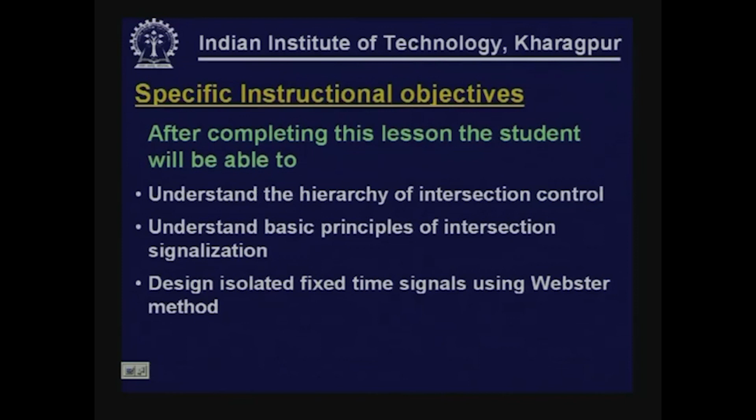First, what is an intersection? In a given road network, you have mid-block sections and intersection blocks. An intersection is simply where two or more roads meet at a point or an area, where two or more highways join and cross.

There are two basic types of intersection normally used. One is the at-grade intersection, where all roads meet at the same level, so all movements use some common area of the intersection. In a grade separated intersection, crossing maneuvers are permitted at different levels.

Grade separated intersections are obviously better, but most intersections found are at-grade, because grade separated intersections are capital intensive projects. Unless traffic delay or chaos at the intersection reaches a certain level, we normally do not go for grade separated intersections. So mostly the intersections we find are at-grade, where all roads join or cross at the same level. Our focus and discussion today is basically related to at-grade intersections.

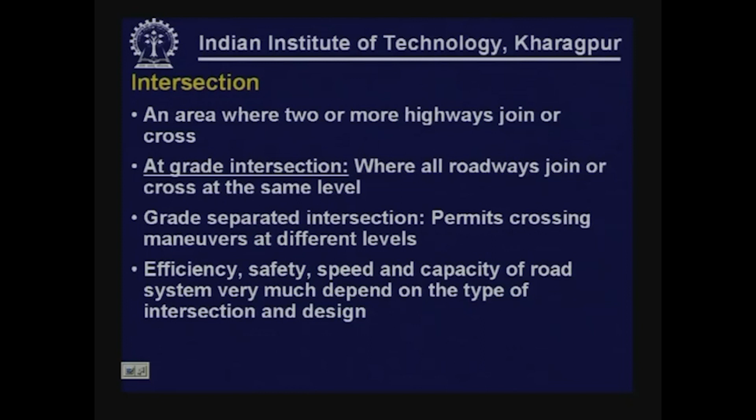Efficiency, safety, speed and capacity of the road system vary a lot depending on the type of intersection and design. There are different types of at-grade intersections, and also grade separated intersections, and what level of efficiency, safety, speed and capacity the road system achieves depends on the type of intersection and the design adopted.

An important concept related to intersection operation is the concept of conflict. Traffic movements at an intersection involve a number of conflict points. These conflict points are normally classified as major conflicts and minor conflicts. Crossing conflicts are normally considered major conflicts, while merging and diverging conflicts are also possible, and these are normally called minor conflicts.

Suppose a vehicle is going one way and another is coming another way crossing it - this is a crossing conflict, considered a major conflict. Similarly, if two vehicles are coming and using the same road, that conflict is a merging conflict. And if, from a road, some traffic takes left and some takes right, that conflict is a diverging conflict. Merging and diverging conflicts are considered minor conflicts because they are relatively less critical, while crossing conflicts are most severe, so we call crossing conflicts major conflicts.

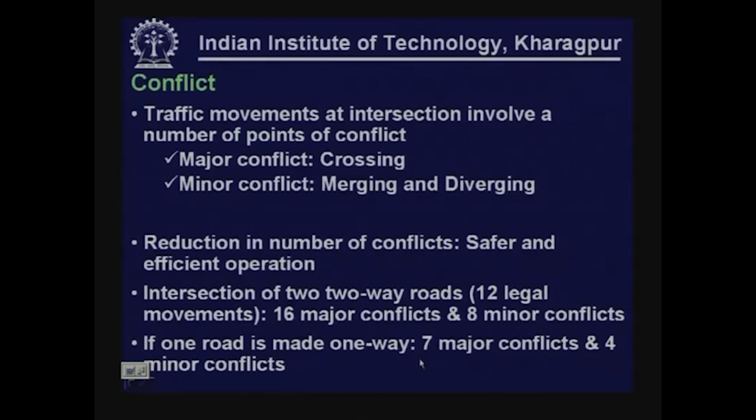Continuing this example, if we make both roads one-way, there will be further reductions in the number of conflicts, with only 6 conflicts, out of which 4 will be major and 2 will be minor. This is a typical example of a 4-approach intersection with two-way traffic on both roads, one-way traffic on one road, and one-way traffic on both roads, showing how conflict points are reduced.

If there are pedestrian movements, pedestrians trying to cross while vehicles are coming, this generates additional potential conflicts. So the critical task of a traffic engineer is basically to control and manage these conflicts in a manner that ensures safety - that is the most important keyword - and provides efficient movement through the intersection for both motorists and pedestrians. So traffic engineers focus not only on motorized vehicles like cars or buses, but also on pedestrians as essential elements in overall traffic engineering concepts. The task is to manage these conflicts to ensure efficient and safe operations for traffic as well as pedestrians.

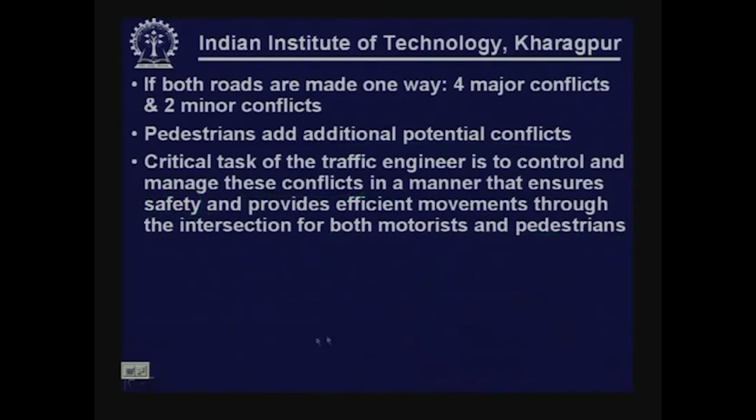With this background, you know that an intersection area is basically a very complex situation where you have different types of vehicle movements and different legalized movements creating conflicts. Also, once pedestrian movements are taking place, they add to the number of conflicts. So it is altogether a complex task, but the complexity varies from one situation to another. From your experience, you'll find that not all intersections are equally critical - some may appear fine, while others may seem chaotic and unsafe for both pedestrians and vehicular traffic.

So we need to understand the hierarchy of intersection control as a concept. There are three basic levels of control that may be implemented at an intersection: level 1, level 2, and level 3. This goes in order - in the most simple form, level 1 may be okay. As the situation becomes more complex, you go for level 2, and for further complex operations, level 3. Even if that does not bring down the chaos to the desired level, you may have to think of a grade-separated intersection.

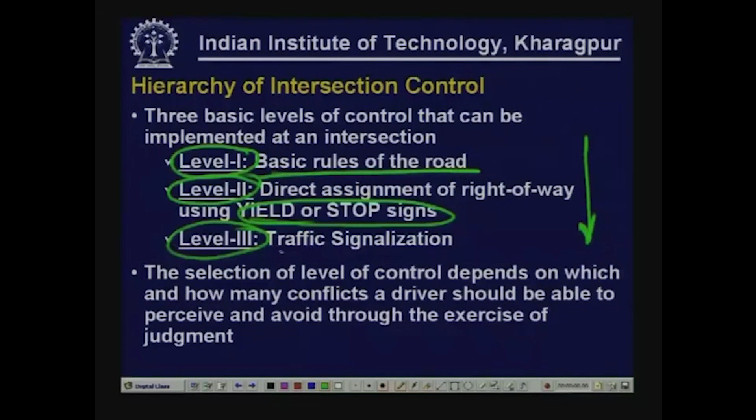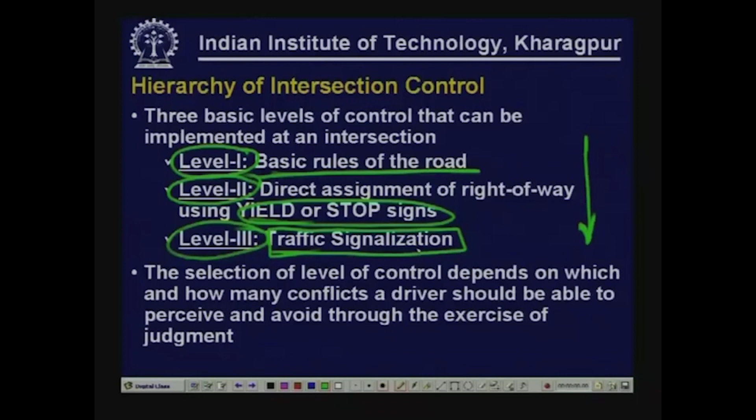That means you install a traffic signal and share the time for certain movements. Maybe while major road movement takes place, you stop minor road traffic, or both roads may be of equal priority, so you stop one and allow the other, then stop that one and allow the first. So with traffic signalization, essentially the same intersection area can be used for certain types of movements at certain times.

Certain types of movements happen at certain times, not all movements at the same time. Some movements take place at one time, others at another time - that is signalization. First, in simple form, we try level 1; if it's not adequate, we go for level 2; if still not adequate, we go for level 3.

Further, even within signals, there are many procedures - isolated signal design, individual signals, and it's also possible to coordinate signals. It's a vast topic area with many procedures to understand. If even with signals you're still not able to manage traffic or ensure adequate safety and efficiency, then one has to think of a grade separated intersection. But our main focus today is at-grade intersections, and further we will go into traffic signalization.

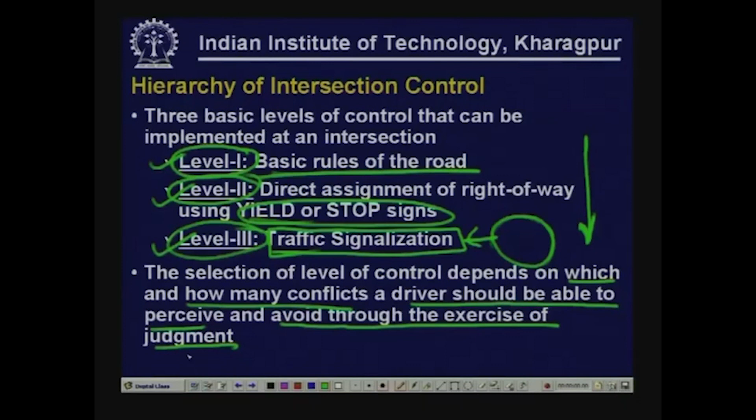Now you have level 1, level 2, level 3. The selection of level of control depends on which and how many conflicts a driver should be able to perceive and avoid through the exercise of judgment. So carefully observe this part - what type of conflicts, and how many conflicts?

Both are important - there are major conflicts and minor conflicts. So what are the types of conflicts and how many conflicts do you expect the driver to perceive and avoid, without making a crash or an accident? The driver should be able to avoid through the exercise of judgment.

If you find both the type and number of conflicts are good enough - much lower - and they don't impose a level of safety problem, then you may be happy with level 1, otherwise go for level 2. If you're still not happy and the situation is not under control, go for level 3.

Where it is not reasonable, due to the complexity of the situation and operation, to expect a driver to perceive and avoid a potential conflict, traffic control must be imposed - control by putting a stop sign, yield sign, or traffic signals.

There are two factors which primarily affect a driver's ability to avoid conflicts. One, the driver must be able to see a potentially conflicting object to implement an avoidance maneuver. This essentially means the geometric design of the intersection - a driver approaching from one approach should first be able to see a vehicle coming from the other approach.

First of all, the driver must be able to see a potentially conflicting vehicle. If he cannot see, because there are tall buildings or high-rise structures just near the intersection, then unless you reach the middle of the intersection, you cannot see a vehicle coming from other approaches.

Second, you may be able to see, but the volume levels that exist must present reasonable opportunities for a safe maneuver. This is another aspect we are trying to point out. What does it mean? It means maybe you are able to see.

So you have adequate sight distance, say a vehicle is coming from the minor road. The driver is able to see, but he has to get an opportunity to really cross or merge into the main traffic stream. He waits, but does not find any gap because the volume is so heavy, he keeps waiting for a much longer time. Then again he is not able to perform the maneuver he intends to do.

So in that case the volume level is critical. If your volume level is beyond a certain value, considering all the approach volumes for different roads, then the driver may not get reasonable opportunities for a safe maneuver.

So looking at the sight distance and the overall traffic volume at the intersection, both these factors affect the driver's ability to avoid conflict. If there is a reasonable gap and traffic volume is not heavy, the driver may keep patience to wait for a suitable opportunity. Otherwise, he may take risk and try to merge with the traffic stream even with a limited opportunity, which may cause a potential safety problem.

Traffic signal alternately assigns right of way to specific movements, as indicated. Some movements are allowed at some time, other movements are stopped. Then the movements which were allowed earlier will be stopped and other movements will be allowed. Therefore, it is expected to reduce both the number and severity of conflicts.

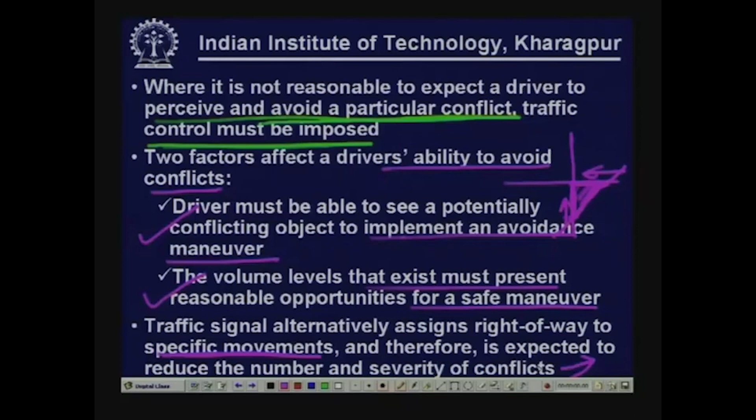There are certain advantages of traffic signal control. They may be obvious based on our earlier discussion, but I will make certain points. Traffic signals provide orderly movement of traffic; chaos is eliminated because some movements are allowed at some time and others at other times, not all movements taking place simultaneously. So it provides orderly movement and increases the traffic handling capacity of the intersection.

Obviously, for that it is necessary to review signal timings frequently. This part is very important. Not only this, it is also necessary to ensure that the geometric design of the intersection is proper. That is another key aspect.

Once the geometric design is ensured, with adequate and efficient design standards, if you just design the signal once and leave it, that may not give required efficiency, because over time the overall traffic volume and the volume from different approaches may change. This applies mostly to fixed-time or pre-timed signals, which are very common in most cases.

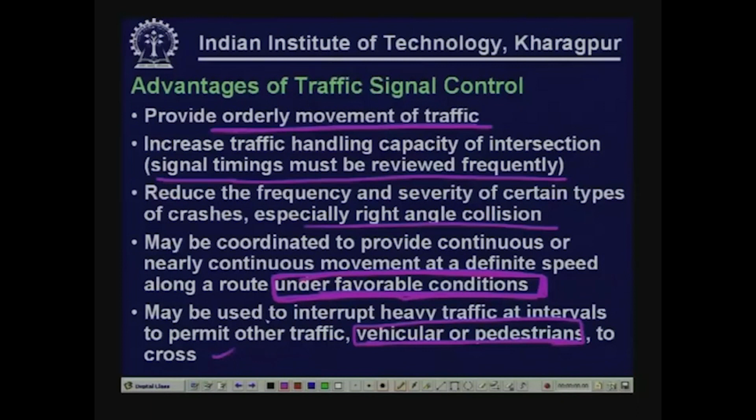Signals may be used to interrupt heavy traffic at intervals to permit other traffic, both vehicular and pedestrians, to cross. In some cases, heavy traffic is moving and it is not safe for smaller vehicles or pedestrians to cross. So you intermittently stop the heavy traffic to make sure other vehicles or pedestrians can move or cross efficiently and safely.

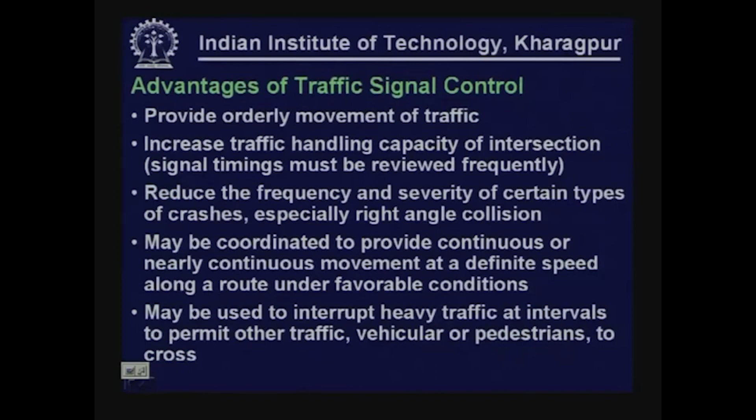There are certain disadvantages associated with traffic signal control. If you do not update the signal timings for a fixed time or pre-timed signal, the delay may be even more. In some cases, because signals are provided, people may try to avoid routes which have signals and take a different route, so the route distribution may change. It is necessary to maintain the signals, update the timings at regular intervals, and look at other aspects.

Now coming to principles of intersection signalization. The decision to install a traffic signal depends on a large number of factors, and it is a complex task, because combinations of traffic volume, potential conflicts, both nature and number of conflicts, present overall safety of operation, present efficiency of operation, and level of driver's convenience or inconvenience, all these combinedly decide whether you need to go for signalization.

There are certain warrants also. Different countries, states, or local bodies may have their own warrants for under which condition a traffic signal is really acceptable. In most cases the values or levels may change, but generally it is combinations of traffic volume, potential conflicts, overall safety of operation, efficiency of operation, and driver's convenience. All these things are important.

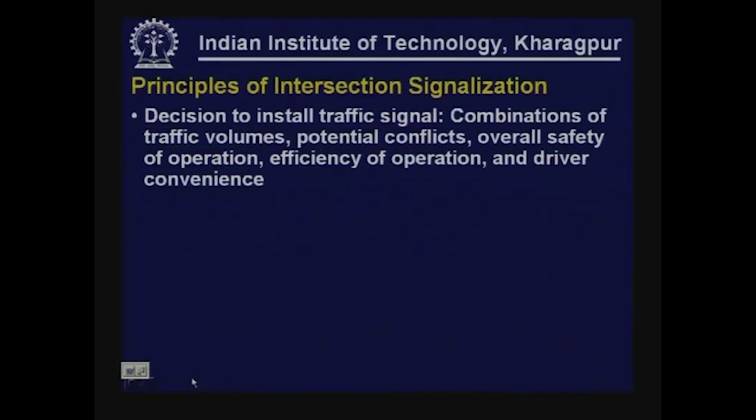Now we try to understand the principles of intersection signalization. There are a lot of terms and definitions which must be known to you very clearly, so we try to develop an understanding about those terms and definitions, and through that develop our understanding of the basic principles for signalization. First, components related to signal cycle - what is cycle?

A signal cycle is one complete rotation through all the indications provided. You are all familiar with traffic signals - if you are moving, sometimes you get red, amber, sometimes green. So a complete rotation through all the indications is provided by a signal cycle.

Then cycle length - cycle length is the time to complete one full cycle of indications. What is the time required for providing one full cycle of indication? That is essentially cycle length.

Then the concept of interval, it is very important. The interval is a period of time during which no signal indication changes. That means when you are operating, suppose it is red, as long as it remains red, it is an interval - it does not change from red to amber, green to amber, green to red, or red to green. So the interval is a period of time during which no signal indication changes.

There are different types of interval. One is change interval. What is change interval? Normally, the yellow indication forms part of the transition from green to red, in which movements about to lose green are given a yellow signal, while all other movements have a red signal. That interval we call change interval.

Let me explain further. Suppose green is given, so vehicles are allowed to move freely. Now suddenly if you give red, it is difficult for the vehicle to stop because the signal changes abruptly. So you provide a yellow or amber indication in between green and red indications, forming a transition from green to red, in which movements about to lose green - earlier it was green, now it is amber or yellow - are given a yellow signal, while all other movements still have a red signal. When the movement under consideration was green, all other movements were given red signals. When this movement is given amber or yellow, still all other movements are given red signal - red signal is essentially continued. So that yellow indication, that interval, we call change interval.

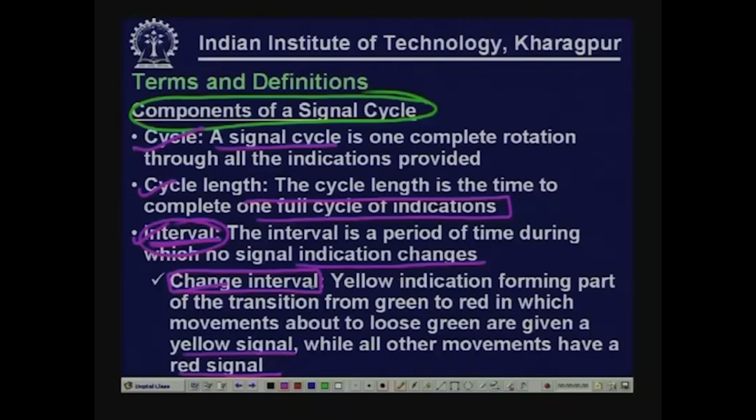Then clearance interval. Clearance interval is also part of the transition from green to red for a set of movements, when all movements have a red signal. It is essentially indicating an all-red kind of situation.

All movements have a red signal because you suppose in amber also some vehicles will move. Those vehicles should be able to cross the intersection safely before another movement is allowed or vehicles are allowed from other approaches, because otherwise there may be a safety problem. So this is the clearance interval.

Then the green interval. For each movement at least there is one green interval during the signal cycle, because a signal cycle gives all movements a chance, allowed at least for some time during the cycle. During this interval, the movements permitted have a green light, while all other movements have a red light. Whichever movements you are allowing should have green light, all other movements will have red light.

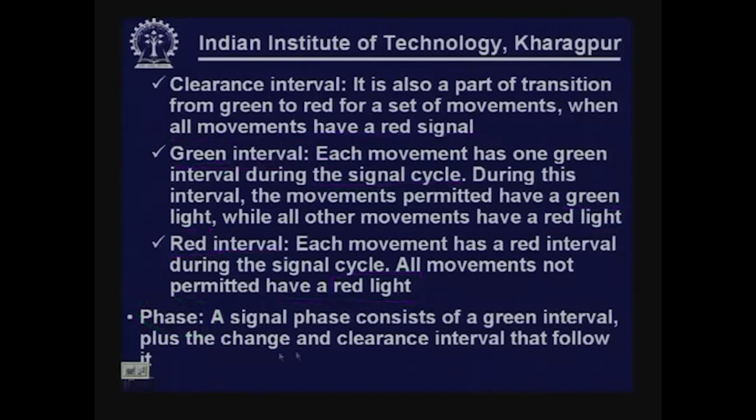Now coming to the concept of phase. A signal phase consists of a green interval plus the change and clearance interval that follow it. Essentially, in a phase we divide the movements. Suppose this is a simple two phase signal - it is also possible to have a three phase or four phase signal. Let us take an example of a two phase signal.

These are the two roads which are meeting. Obviously, when providing a signal, you do not allow all movements to take place at the same time, so given the signal time, you divide it into different phases. Suppose this is a two phase signal - this is phase 1, where you do not allow any movement on the east west road. Let us consider this one as the east west road and this as the north south road. So east west road has no movement allowed, only north south road has all movements allowed.

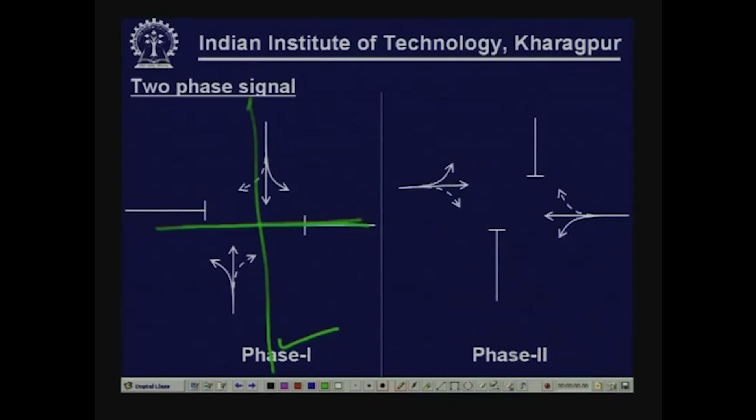So you are basically allowing 6 legalized movements - from this approach left, straight, right, and from the other side also left, straight and right. Now this is phase 1. In phase 2, you do not allow movement on the north south road, you allow only movement for the east west road. So here again, from each approach you are allowing all 3 movements. Phase 1 plus phase 2 is one complete cycle.

Now you might be thinking, I am sure, that here also we are allowing right turning traffic and the straight going traffic is also allowed from the other direction, so there may be potential conflicts. Yes, in phase 2 operation in this particular example we are allowing that conflict, but this kind of phase may still be okay if your right turning volume and the straight going volume from the other direction are not significant.

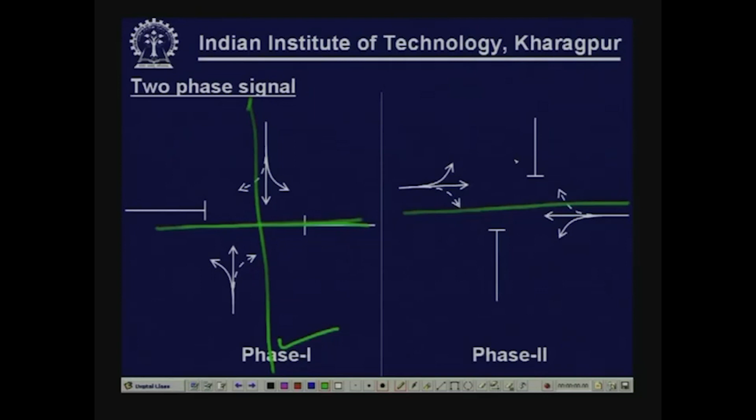That means altogether the traffic volume for right turning and straight going from the opposite direction is not heavy, and suitable gaps may be obtained by the right turning traffic - maybe only a few vehicles are there, so they can still get a gap within that phase to take right turn safely. But as traffic volume grows, and right turning and straight traffic from the opposite direction both increase, the same issue occurs on the other road too. Then you may have to provide a separate phase - so we may go for a 3 phase signal.

Here you can see that in phase 1, again the east west road movement is stopped - all movements are stopped, only the north south road movement is allowed. Here we are allowing left turn and straight, and from the opposite direction also left turn and straight, so there is no conflict. This right turn is also stopped, and the right turn from the opposite direction is also stopped, so there is no conflicting movement. This is phase 1.

In phase 2, we just clear these 2 right turning movements, assuming that north south is the major road and east west is a minor road with very little right turning traffic. Often it happens that both roads may not have equal priority - one may be a major road and another a small crossroad. In this example, let us consider that the north south road is the major road, so it has a lot of right turning traffic, and we are giving it a separate phase - phase 2 - for right turn.

So this right turn is taking place, and this right turn is taking place. Only right turning vehicles are allowed, so there is essentially no conflict.

In phase 3, we stop movement on the north south road. Movements are now allowed on the east west road, and like in the earlier example, we allow all 3 movements, assuming that since it is a minor road, right turning traffic is not significant. So they can somehow find a suitable gap and safely do the maneuver. This is an example of a 3-phase signal.

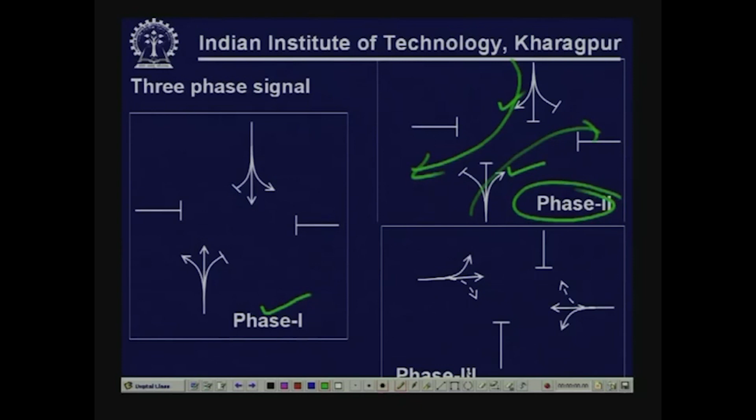If you find both roads are equally important, then like I have done for phase 1 and phase 2 for north south traffic, similarly you may need another 2 phases total. So you may have to design a 4-phase signal for that kind of situation.

Coming to signal operation, there are 3 types of operation: pre-timed operation, semi-actuated operation, and full actuated operation.

In pre-timed operation, the cycle length, phase sequence, and timings of each interval are constant during that period. So we do not consider short fluctuations in traffic demand, total and approach volumes.

In semi-actuated operation, detectors are placed on minor approaches only. This is suitable when you have a major road and a minor road. All the time it will generally be green for the major road movement, and detectors are placed for minor road approaches. If actuations are noted from one of the minor approaches, the traffic signal may turn red for the major road traffic and become green for the minor road traffic, but subject to limitations like minimum green time for the major road and maximum green time for the minor road.

When both roads are important, we may go for full actuated operation, where every lane of every approach must be monitored by a detector, and accordingly the signal cycle, sequence of phase, green time, and split may all be calculated, and all this may vary from cycle to cycle.

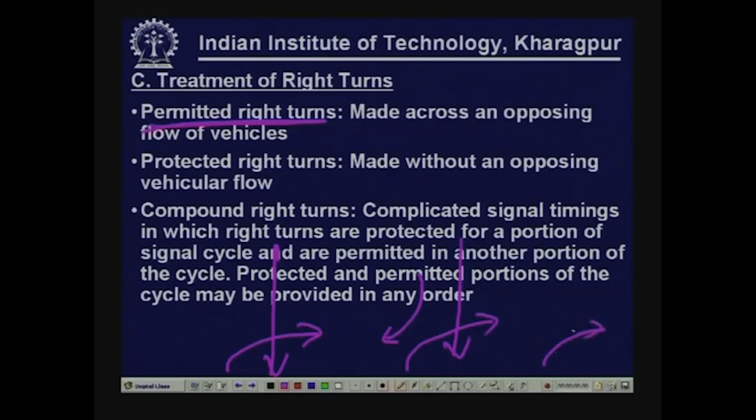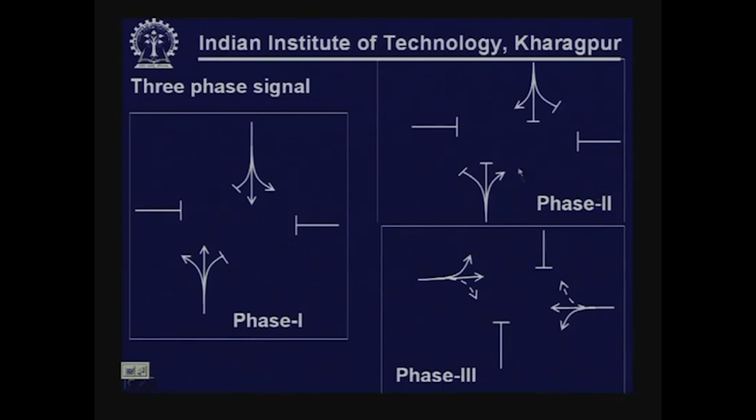Protected right turn is made without an opposing vehicular flow. That means when these right turns are taking place, there is no vehicle from the opposite direction. It is a situation like I have shown here. This is a protected right turn, where right turn is made so there is no straight moving vehicle.

Coming to the concept of discharge headways, saturation flow, and loss times, you are already familiar with the concept. I have discussed earlier in other lessons about saturation headway, which is the constant headway achieved. Saturation flow rate is the flow rate with respect to saturation headway. I have also discussed earlier about the startup loss time and clearance loss time.

Startup loss time is the summation of incremental headways above h. For the initial few vehicles, this is applicable, as they will have longer headways than the saturation headway, and startup loss time occurs every time a sequence of vehicles starts moving on a green signal. So when the vehicle starts moving on a green signal, every time this queue starts moving, startup loss time will occur.

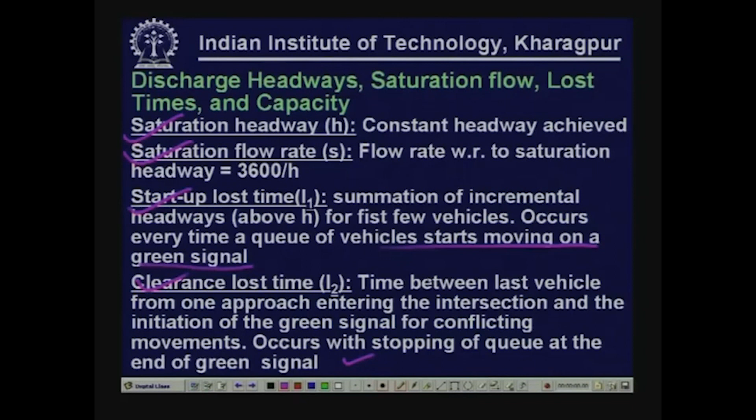Similarly, the clearance lost time is the time between the last vehicle from one approach entering the intersection and the initiation of the green signal for conflicting movements. So clearance lost time occurs with the stopping of the queue at the end of the green signal. All these concepts I have discussed earlier, so I am not elaborating them once again.

So the total lost time is basically startup lost time plus clearance lost time. We denote it as L1 plus L2, and normally total lost time is denoted as TL.

Now coming to the effective green time, this is a new concept here. For any given set of movements, effective green time is actually the amount of time vehicles are moving at a rate of one vehicle every h seconds. That means, during the whole period, it is not that vehicles are always moving at one vehicle every h seconds. That is happening when the headway is operating under saturation headway.

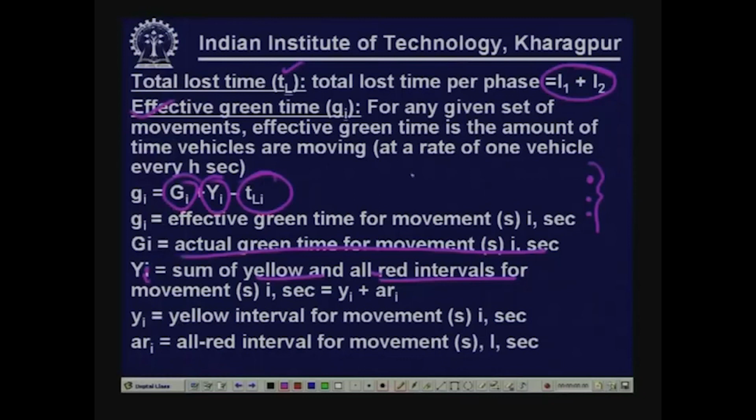But if we take the complete time, then what is the effective green time that we can calculate, where during this complete effective green time we can assume that vehicles are flowing at a rate of one vehicle every h seconds. This is normally denoted as small g i. How do we calculate that? This is basically the total green time given for movement i, plus yellow and all-red intervals for that movement, minus total time lost. Total time lost is nothing but L1 plus L2. So you have green time, then amber, then all-red. Now during this whole time, flow is not taking place at one vehicle every h seconds. So this is total time green plus yellow plus all-red minus total lost time. That is the effective green time, where we can assume vehicles are moving at a rate of one vehicle every h seconds.

Now capacity of an intersection lane or lane group may be calculated easily. Remember that saturation flow rate represents the capacity of an intersection lane or lane group assuming the light is always green, but this is not the case in reality. Light is not always green. So the portion of the real time that is effective green is defined by the green ratio. Green ratio is the ratio of effective green time to total cycle length. Effective green time is the amount of equivalent green time where we assume the flow takes place at one vehicle per h seconds, where h is the saturation headway. So this effective green time to cycle time ratio is known as green ratio. Obviously, if we multiply the saturation flow for a given approach or lane group by this G by C ratio, the green ratio, we get the capacity.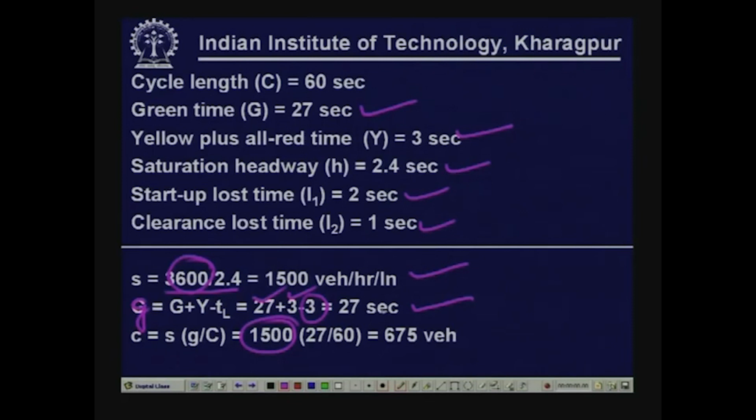So the capacity is saturation flow multiplied by the G by C ratio, effective green to cycle time ratio, because saturation flow is applicable for continuous green signal. So 27 by 60 gives you 675 vehicles.

Coming to the design of isolated fixed time signals, there are a lot of approaches available, from simplest to most complicated, and it's not possible to cover all of them. So I will just cover the simplest one, which is also used in many places, the Webster method. Essentially, using the Webster method, we try to find the optimum cycle time that will minimize total delay. For a wide range of practical conditions, this method is applicable, and minimum intersection delay is obtained when the cycle length is given by this formula: C0 equals 1.5L plus 5, divided by 1 minus the sum over i equal to 1 to phi of y max. Here C0 is the optimum cycle length in seconds, phi is the number of phases, and L is the total lost time per cycle, a concept you are already aware of.

Y max is the critical flow ratio, a slightly new concept. It is the maximum value of the ratios of approach flows to saturation flow for all lane groups using that phase, that is, Qij by Sj. Sj is the saturation flow for lane group j, and Qij is the flow on lane groups having the green signal during phase i. That way we get the critical flow.

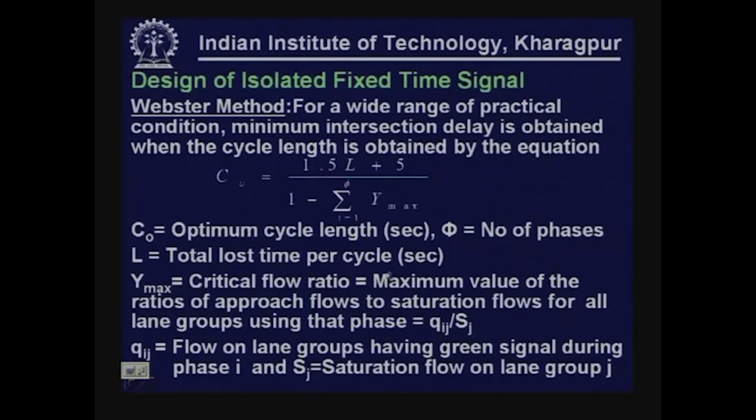This is a very simple example, but just to show you the calculations. So we calculate YA, the critical flow ratio. In this case only one value is given. YA equals QA by SA, QA flow is 400, corresponding saturation flow is 1250, so you get 0.32 as the ratio.

Similarly, YB is 0.25, and Y is the sum over YA plus YB, which is 0.57. Total lost time is 2n plus R, so 2 into 2 plus 12 seconds; all-red time is 12 seconds and there are 2 phases, so there are 16 seconds.

Once you calculate that using the given formula, you can calculate the C0 value, which is the total cycle length that will optimize the total delay, that is 67.5 seconds.

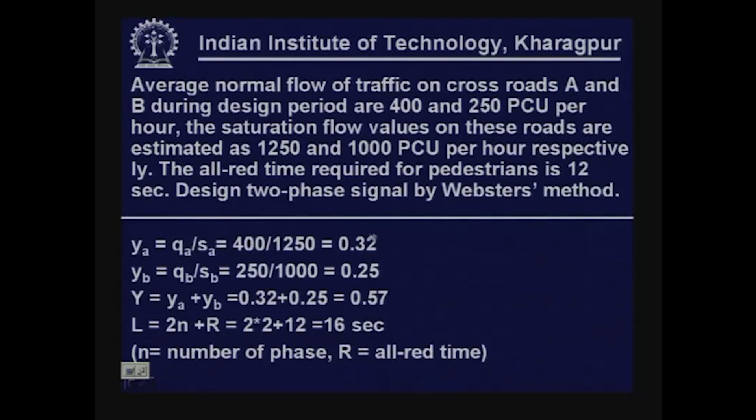Now, green time for approach A will be a ratio of 0.32, YA by sum over Y, because sum over Y is 0.57, out of that for approach A it is 0.32. So 0.32 by 0.57 multiplied by not 67.5, but 67.5 minus 16. Why 16? Because all-red time is 12 and amber time we are assuming 2 seconds. There are 2 phases, so 2 into 2 is 4 seconds; so 12 plus 4 is 16.

So 67.5 minus 16, this multiplied by 0.32 by 0.57, gives 29 seconds. Similarly, for approach B, green time is 22.5 seconds. That way you can calculate.

Of course, this is a very simple example and you need to refer to other books and other examples to have further understanding about signal design, cycle design, and phase design. This is just an elementary idea.

Some of the questions: define major and minor conflict, define basic levels of control that may be implemented at an intersection, define and discuss types of signal operation, what is the difference between permitted right turns and protected right turns, and explain your understanding about effective green time.

Now, quickly trying to answer some of the questions. Capacity and level of service, this I have already discussed earlier; as per HCM, the definitions are there. Different traffic factors affecting traffic capacity, primarily percentage of commercial vehicles, that is very important, and the directional distribution. These are the two major traffic factors which affect capacity.

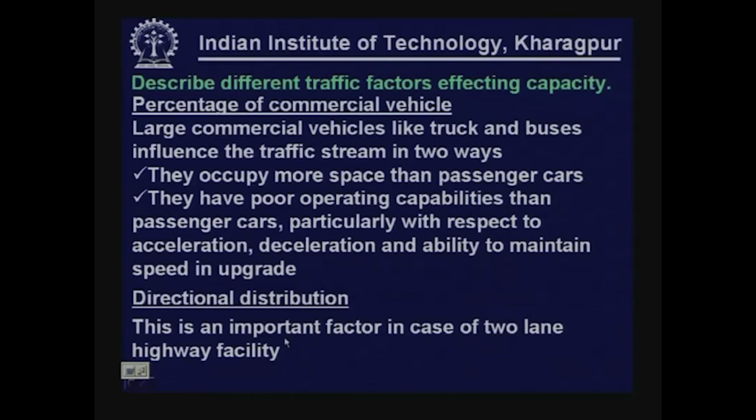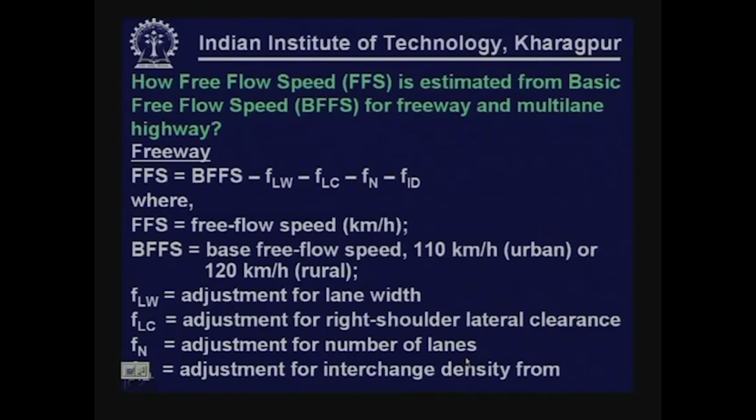How is free flow speed estimated? From basic free flow speed for freeway and multi-lane highways, the approach is basic free flow speed, which is then reduced considering the relevant factors. The correction factors for freeways are adjustment for lane width, adjustment for right shoulder lateral clearance, adjustment for number of lanes, and adjustment for interchange density. For multi-lane highways, the required adjustments are due to lane width, lateral clearance, median type, and access points.

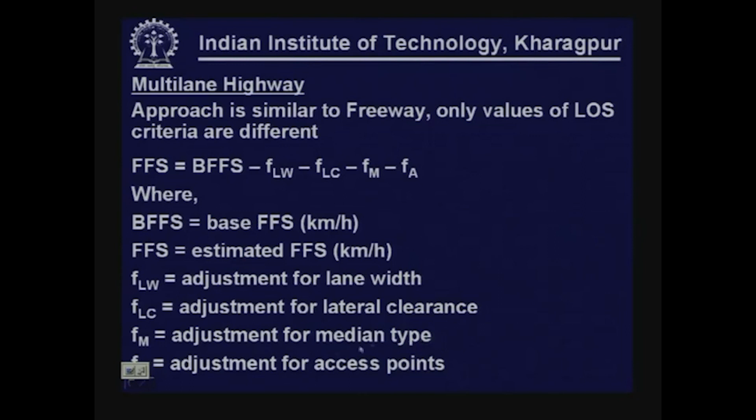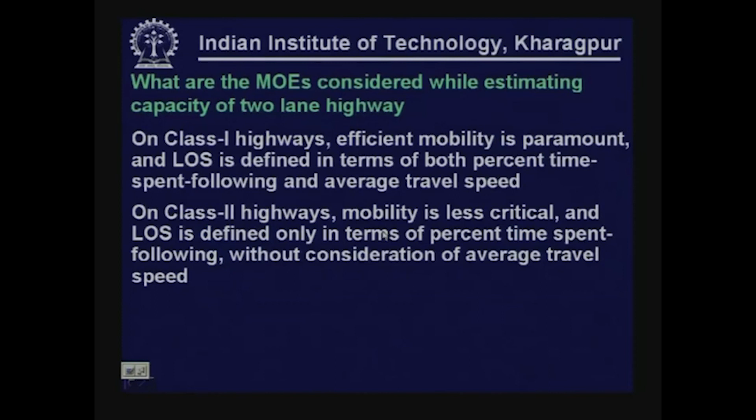What are the MOEs considered while estimating capacity of two-lane highways? There are two types of two-lane highways, class 1 and class 2. For class 1, efficient mobility is paramount, therefore LOS is defined in terms of both percentage time spent following and average travel speed. For class 2 highway, mobility is less critical, therefore LOS is defined only in terms of percentage of time spent following, without considering average travel speed.

Now, since this is the last lesson under this module, I am also trying to quickly answer the questions I raised for this lesson.

Major and minor conflicts: crossing is the major conflict, and merging and diverging are considered the minor conflicts. Mention basic levels of control that may be implemented at an intersection.

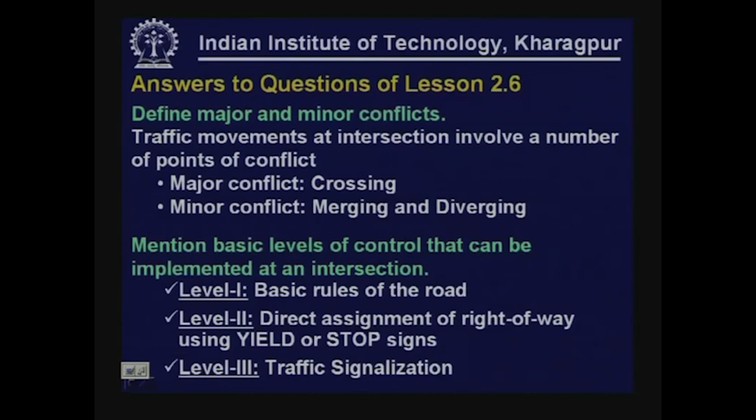There are 3 levels of control: level 1, level 2, level 3. Level 1 is basic rules of the road. Level 2 is direct assignment of right of way using yield or stop sign. Level 3 is traffic signalization.

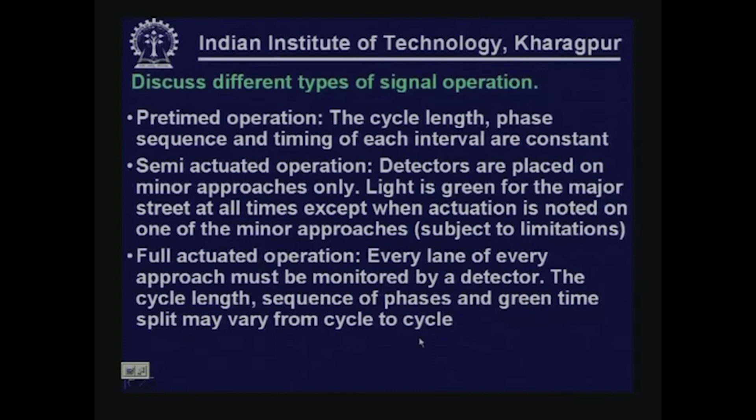Discuss different types of signal operations. There are 3 types: pre-timed operation, which is fixed signal cycle, sequence and timing. Semi-actuated operation, suited for one major road and one minor road. And full actuated operation, where every lane of every approach must be monitored by detectors, and cycle length, sequence of phases, green time, everything may vary.

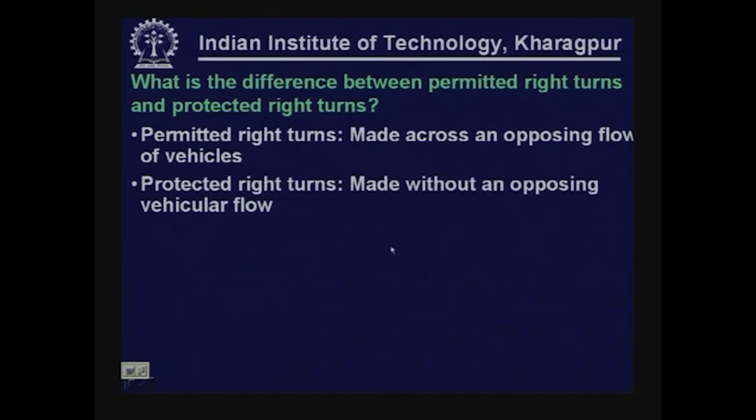What is the difference between permitted right turns and protected right turns? Permitted right turns are right turns made across an opposing flow of vehicles, while protected right turns are made without an opposing flow of vehicles.

Explain your understanding of effective green time. For any given set of movements, effective green time is the amount of time vehicles are moving at a rate of one vehicle every h seconds, where h is the saturation headway. It is the actual green time plus the sum of yellow and red intervals, minus the total lost time. That way you can calculate the effective green time.